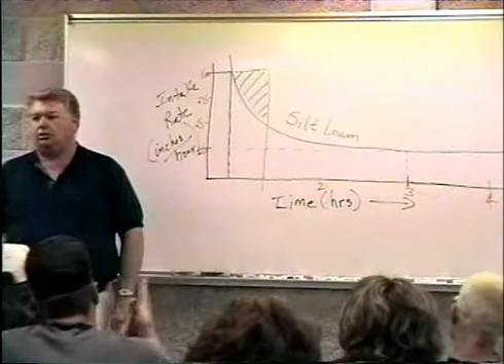If I kept running it out here for an hour, look what happened to me. All of this water is going to run off because there's an awful lot of slope around this building. All the water above the curve is going somewhere else because it can't stay here in this soil. It can't go in fast enough because my intake rate is starting to fill up and it starts to slow down. As the profile fills up, all those big air voids get full of water, and it starts to slow the permeability of the water internally.

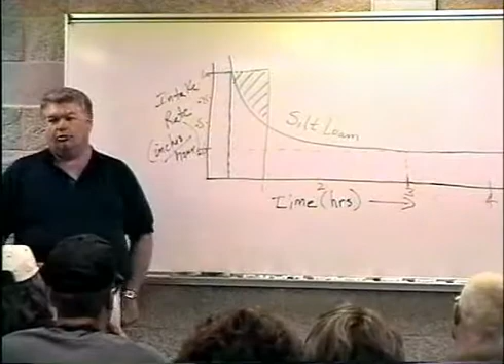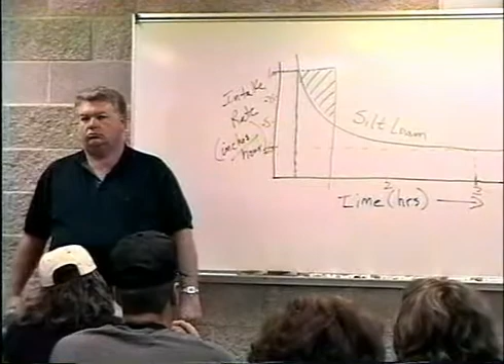Okay? So there's a real twist to how we can irrigate. We have to look at the instantaneous capability of that soil to be able to live with it and know what our maximums are. What are our maximums? How far can I take it before I start running off? I need to know that.

Now if I need to put an hour's worth on, what I need to do is shut it off after 20 minutes and let it sit there and soak in for a while, and let this straighten itself back out again so it's ready to take another big rush of water. And hopefully I can let it sit long enough to do that. Might not be able to.

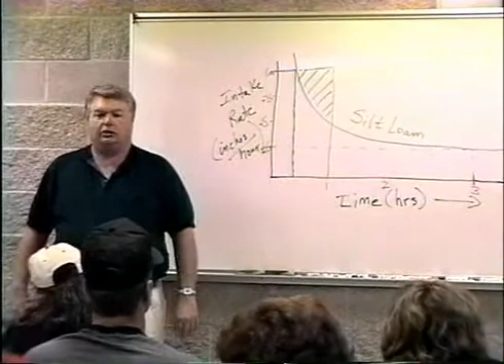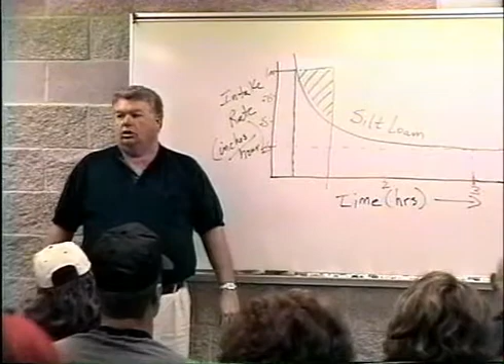Yes? Would you base that intake rate on the type of soil? Is the intake rate based on the type of soil? Absolutely. That's why I say this curve would be specifically for a given silt loam. We'll look at some others here in a minute. Good point.

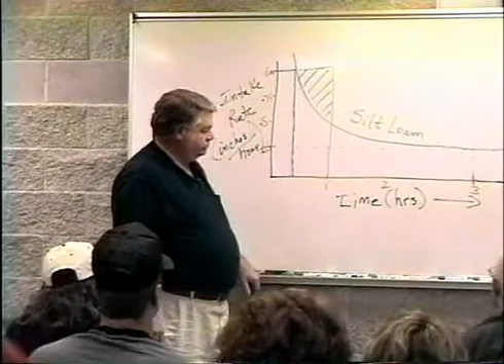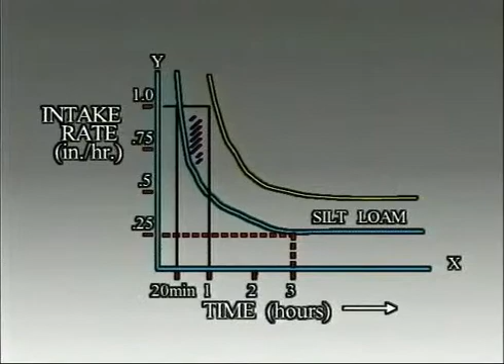Now, if this were a sand, what's the curve going to look like? Dan brings up the point. What's it going to look like for sand? Is it going to be worse or better? It's going to be higher, isn't it? Because we can do a lot better with sand. Sand might be up here where we have a constant. When we get out here, it might be something like this, forever. And it's going to reach its constant quicker, generally speaking, but it's going to be a lot higher. So see this one, it's up here about 5 to 6 tenths an hour. This would be more characteristic of a sand.

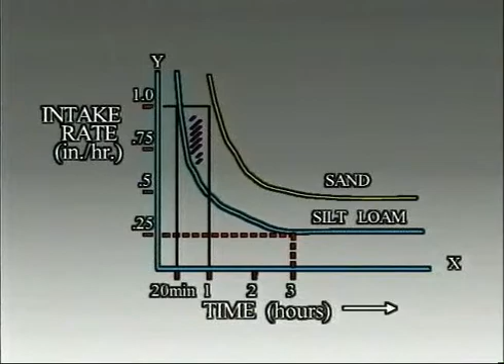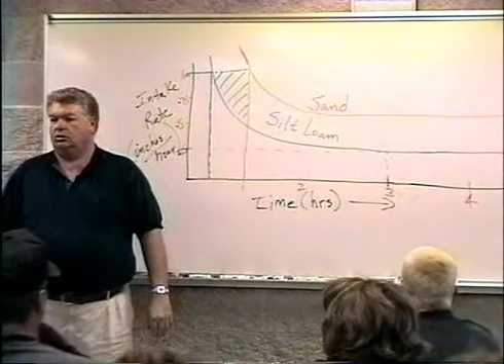Well, now I can run a whole lot more water on my wheel line if I wanted to. I could nozzle up so I'm running twice the flow rate, and I'd only have to run it half as long. I could get across the field a lot quicker. I'd run bigger flows. If I'm watering turf, I can put on these great big heads, let them run longer, and it's not going to hurt me any. All the water's going to sink in. And we're going to get real high rates out of some of these big turf heads.